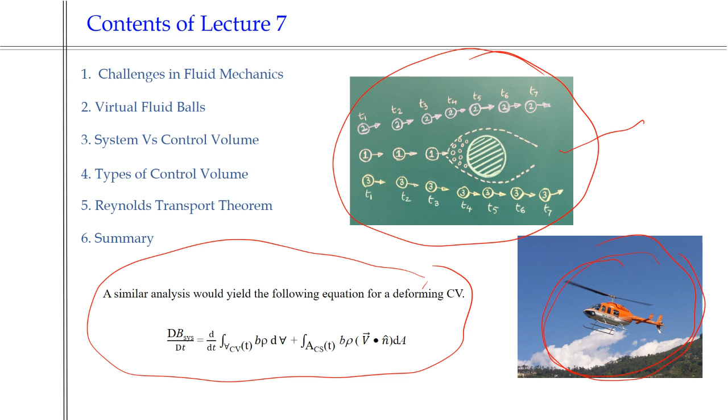If you look at these illustrations, the basic idea is, again, I want to convey that we want to give fluid mechanics as illustrations, and you should visualize fluid mechanics. Apart from understanding fluid mechanics mathematically, please visualize fluid mechanics. That's the reason we talk about the virtual fluid ball concept, we talk about these types of photographs, and finally we derived the Reynolds transport theorems. So this is the instruction style we have been following. That's our basic way to teach these courses.

Next, let's come to the problems, the questions you have asked. What is the difference between stagnation pressure and static pressure? This is quite an interesting question for us. Okay, let's go to the next slide. These are the slides I used in my class. What is the static pressure? In Bernoulli's equation, we define three terms: static pressure, dynamic pressure, and hydrostatic pressure.

The static pressure comes from the flow energy. The name is static pressure, but that doesn't mean the fluid is at rest. Please don't have that concept. It is the flow energy per unit weight, which we define here as the pressure. That pressure component we are defining here. So please don't confuse static pressure with fluid at rest. Next.

When you have fluid particles like in these problems, these are streamlines. The fluid particles are coming in, and because of the presence of this object, the fluid reduces its velocity, which tends to 0. That is the point where the fluid particles' velocity equals 0. By that time it converts the velocity head and the flow energy pressure into the stagnation pressure. So stagnation pressure has two components, the flow energy head and the velocity head. When we put a pitot tube, we measure these two terms combined, because at that point the incoming fluid particles convert their velocity head into an equivalent pressure head, making the stagnation pressure. So that's how you can understand the stagnation pressure and the static pressure.

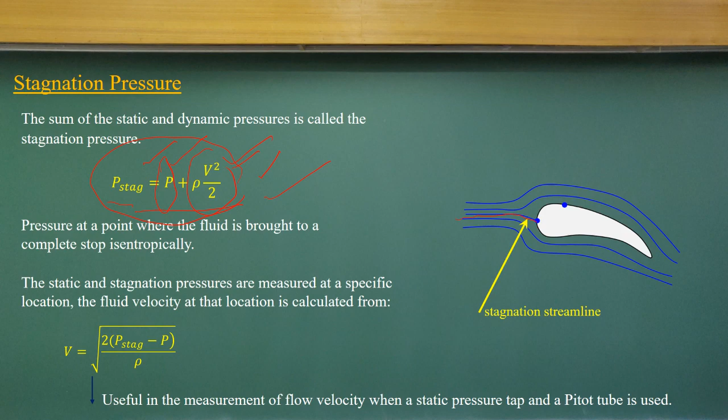Next, regarding the pitot tube: when you have the stagnation pressure, that means we measured both the static pressure and the dynamic pressure. Because the pitot tube can have different positions, we can consider the elevation with that. So the pitot tube measures the total pressure if you align it at different points, and here it shows where the stagnation pressure could be. So the pitot tube is used to measure total pressure because it is the combination of the static pressure and the dynamic pressure. That's the answer. Next.

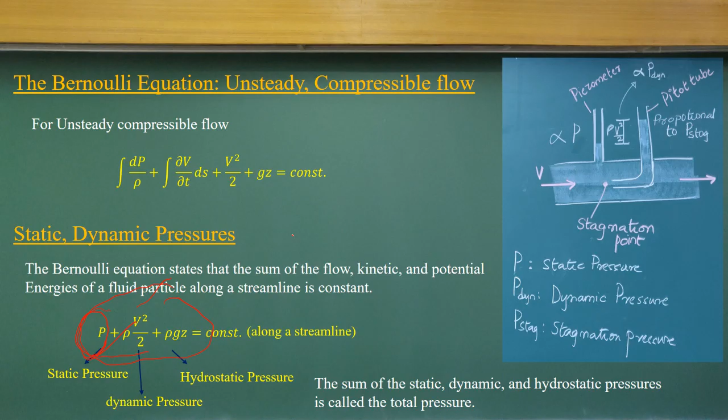Water flows steadily vertically in a constant cross section; using the Bernoulli equation, you have to find the relationship of pressure and velocity with respect to height. It's a steady flow in a vertical pipe with constant cross section, so you can easily use the continuity equation to show the velocity does not change. Only the pressure changes with height. Using the Bernoulli equation, we can demonstrate that if there is no change in velocity, the pressure decreases with height. It's a very simple problem.

The next problem is part of the GATE questions. If you look at this question clearly, it's a Bernoulli equation, but in integral form. This integral form allows us to consider pressure variability and also density variability. If we consider density variability, then it is a compressible fluid. So this equation implies a compressible fluid. Since it's a Bernoulli equation derived along the streamlines, the basic assumptions were steady and frictionless. So the option is steady, frictionless, compressible fluid.

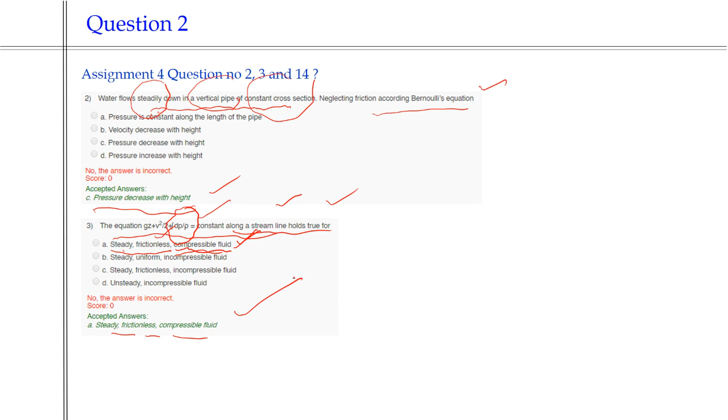Next, there is a question: what is fluidity? I believe this question is not relevant to us; please Google it to get the definition of fluidity. It's not part of the fluid mechanics course; it's a description of fluid flow in literature. Next.

Question 4, which is asked in a Google Doc, that's what is assignment 4 velocity head answers. There are some points given. I think these are the minor mistakes that were there in the assignments. We gave an announcement for this question. Please relook, ask me questions, and also look at the announcement. We have taken care of that.

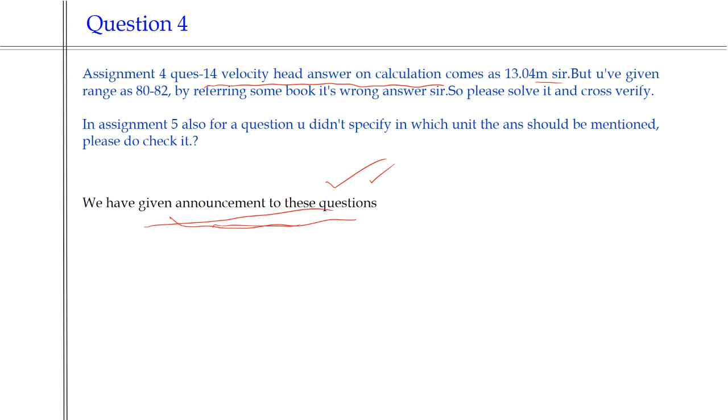Next, question number 5, it's quite lengthy. Thank you for asking these big questions. Okay, from aerospace backgrounds. We also demonstrate the wind tunnels, at very basic levels.

If you look at your first question, what is the difference between vortex and vorticity? Please refer to my video lectures. Try to understand what is vortex, what is vorticity. Vorticity is a measure of the vortex. Please go through my lectures again and relook at the way I explain the vortex and the vorticity.

Second question is quite interesting, how you have taken the assumptions of solving the questions like steady, laminar, turbulent, 1D, 2D. It was not clearly given, especially laminar and turbulent. This is what I was looking for, to have this type of questions from the students. I'm really happy to get questions from the students about how we give these types of assumptions while solving the problems.

If you look at that, this is something of an art. You try to understand what could be the flow. That is the basic thing in fluid mechanics, to simplify the problems. And when you simplify the problems, we have to take these assumptions. And how they are relevant, are your simplifications correct? That is what your knowledge of fluid mechanics takes care of.

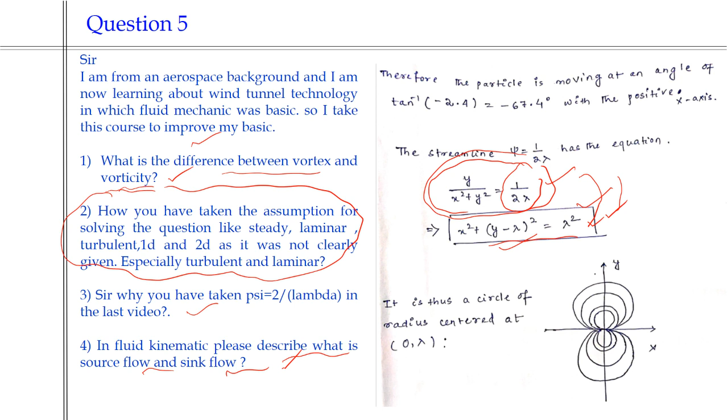Yes, question number 6, it's quite interesting. We are teaching the Reynolds transport theorem at a very undergraduate level. It's natural to have doubts between Lagrangian, Eulerian, and system and control volume. Let me just brief it in the live session. I cannot deliver full lectures here.

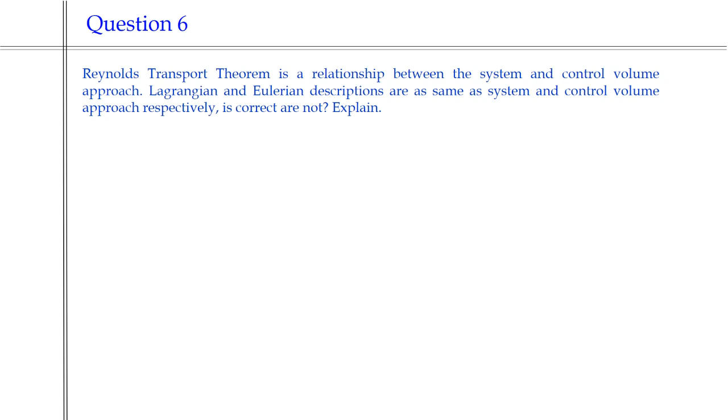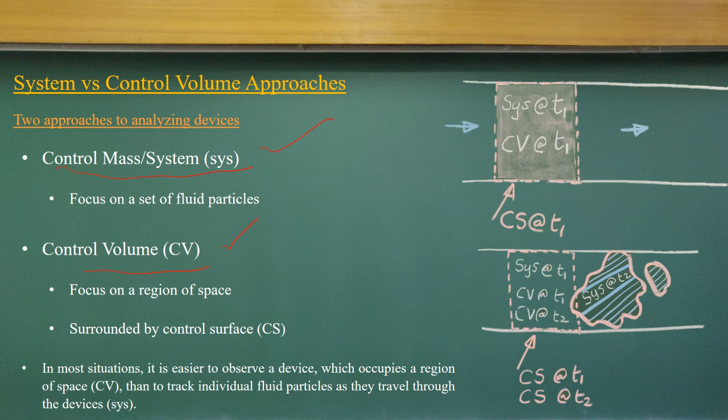See, if you talk about systems, all the physical equations are satisfied, as in solid mechanics. That means we define a control mass and a control volume. Try to understand that. We apply the Reynolds transport theorem to have a relationship between the system and the control volume. At the system level, all these physical equations, mass conservation, linear momentum, angular momentum, energy conservation, are valid. But when you come to Eulerian and Lagrangian descriptions, next slide. This is next.

In the case of the other framework, we don't consider the particular particle level. We consider the average conditions, behaviors, and that is what we represent as the Euler framework. These are flow descriptions. That is the way to establish the relationship between system equations and the control volume. So, the control volume we use to solve all these fluid mechanics problems, as we have done. So, please relook at it, just think more about what the difference is, and I think you can get more details next.

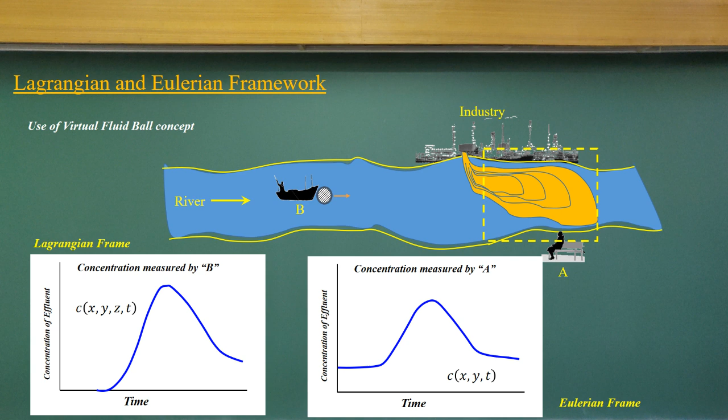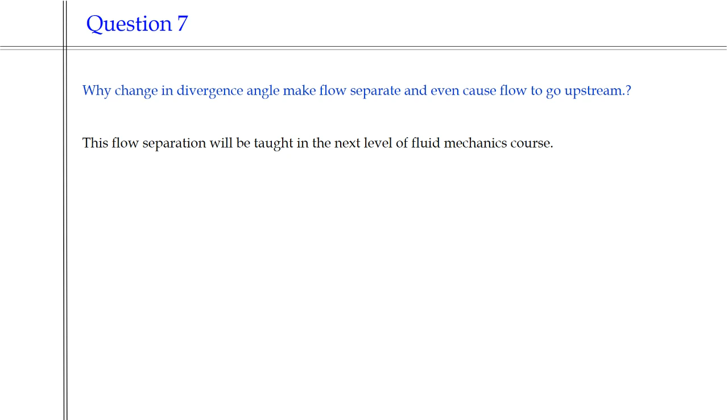Yes, these are quite interesting questions, and I can give you a simple description of flow separation, how it takes place, how it affects the upstream. But at this basic level of course, I don't believe it's necessary to discuss now. We can discuss it at the next level of fluid mechanics when I talk about flow separation.

Next. Okay, so question number 8, a very simple problem which we have solved. In these typical problems, what we have done is equate the sum of the force components in the x direction with the change in momentum flux. Momentum flux is rho q v. There is no outgoing momentum flux in x, because the flow direction changes by 90 degrees. So, you only have the influx momentum flux, which is rho q v. v can be written as q by a, so it is rho q square by a. It is a very simple thing. This change of the momentum flux is the force acting in the x direction.

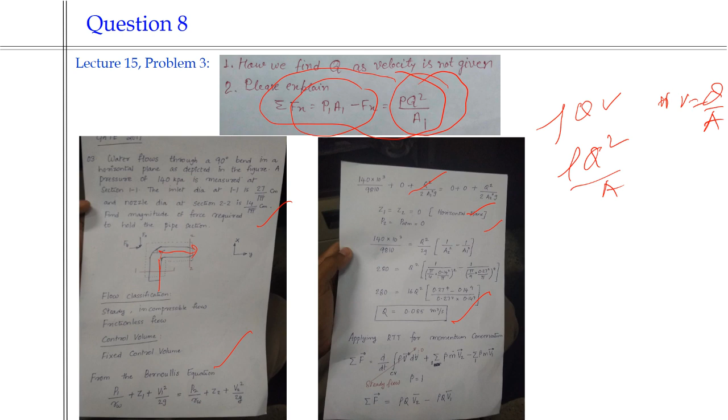It is a very simple trick problem where we apply the Bernoulli equation to solve it, since q is not given to us. This is a GATE question. Is it correct? It is a GATE question. Most of the time GATE questions are given like this, where some of the parameters, like q, are not directly given. Please have an understanding of how to solve this type of problem. Yeah. So, we will take whatever questions they have now.

Yes, so the first question from Priyanka is: please explain the momentum flux sign conventions. Okay, let me explain. If I draw the control volume, then at the control surface I can know the velocity directions, inflow or outflow. If you know the velocity direction, you know the momentum flux. Is it a positive or negative direction? Inflow to the system or outflow from the system? These are very easy things. First draw the control volume, draw the control surface, see at the inlet and outlet what the velocity directions are. Is it an inflow or an outflow? Rho q, the mass flux, into v. So you have the direction component along v, and you know the momentum flux direction, inflow or outflow.

The sign conventions we follow depend upon your coordinates, where you have the x axis and y axis. So, do not be confused by sign conventions; you can define any x and y coordinate system, but try to locate your momentum flux direction, inflow or outflow, along the x axis or y axis. That you can simplify at the control volume level.